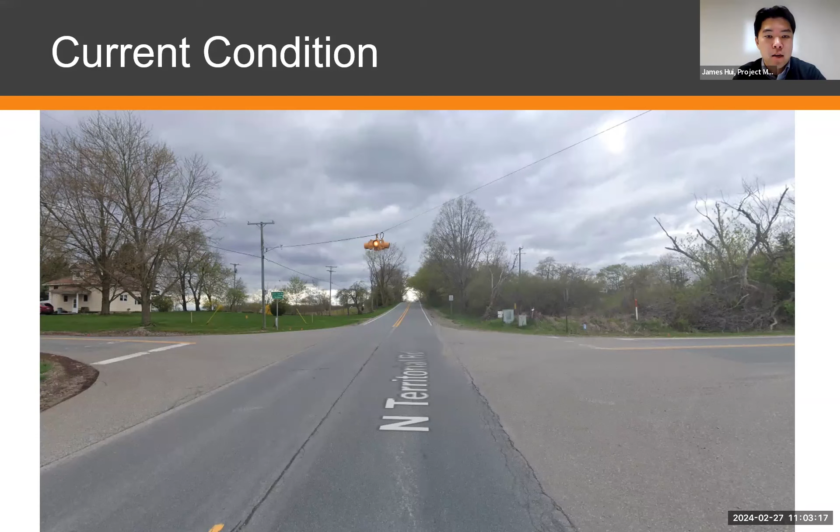Funding and costs: we like to be as transparent as possible about the funding. We have a mix of federal funding and Michigan transportation funding in this job. And the project overall is estimated to be about $2.1 million.

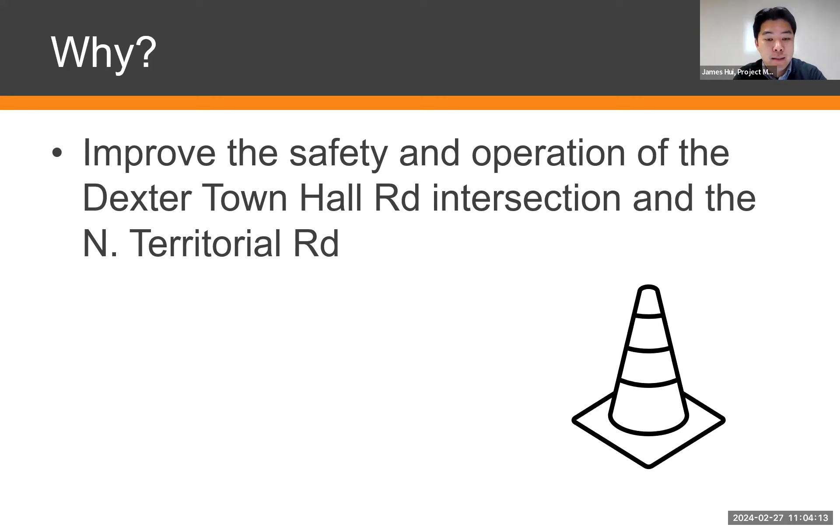So why? We talked about this a little bit before. There's a variety of things that we're trying to improve at this project, including the intersection, improving sight distances. You've probably noticed a lot of utilities that have been moving out there in the recent months. We are replacing the culvert east of this intersection that happens to flood pretty frequently, and we're raising the road to a certain extent around the intersection as well to try to prevent that flooding from happening in the future.

Project overview: we will be removing trees. You might be noticing a lot of trees marked for removal now. The reason we mark these trees is that either they're in our improvement limits where we have to remove them to widen the road and improve the intersection, or if these trees are too close to the road where it could pose a danger for motorists, those trees are also marked for removal. I believe we have been in contact with a lot of residents out here on tree removals, and those that want the wood have been contacted as well.

Again, we're replacing the culvert that's east of the intersection. We have noticed in recent years that it does flood there, and we've noticed that the culvert is failing in that spot. So to add to this improvement project, we have included that culvert replacement, and we're raising the road over the culvert as well.

And then the primary chunk of this work will be at the intersection itself. We're adding a left turn lane on North Territorial for both northbound and southbound Dexter Town Hall Road. And then, like I mentioned before, we will be doing minor work outside of the road construction limits, including center line rumble strips.

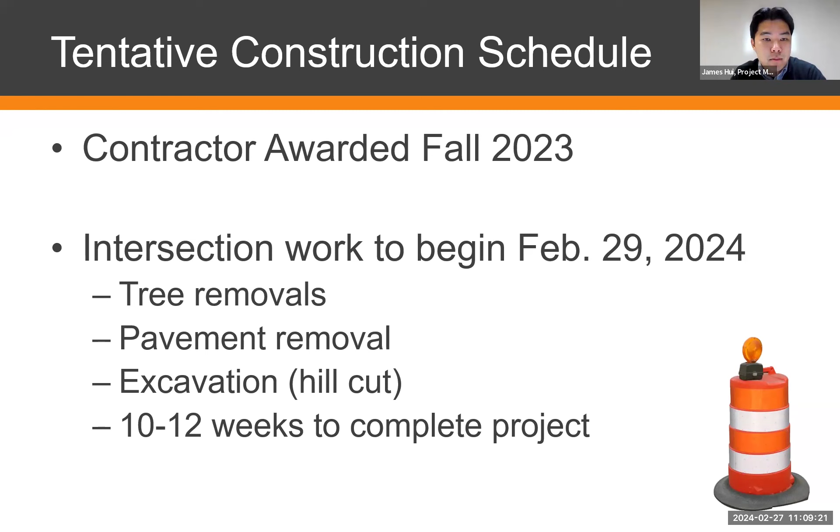As for impact to traffic, I think we're hammering on the same information over and over again, but it's very important to keep talking about it, because one of our biggest concerns when closing a road is that people just don't know - they aren't aware of it until they get to the closure. At that point, I've done it myself, you panic and try to figure out how to get around it. So we try to be as transparent as possible and communicate as early as possible.

We've had signs out, message boards out, basically indicating when we're starting the project. We are making sure everybody on this meeting is aware that this closure is a full closure. Again, we will make sure that all residents and businesses within our limits will have access in and out of the project safely. But for anybody else that's not within our project limits, you cannot make it through - you cannot go through the intersection.

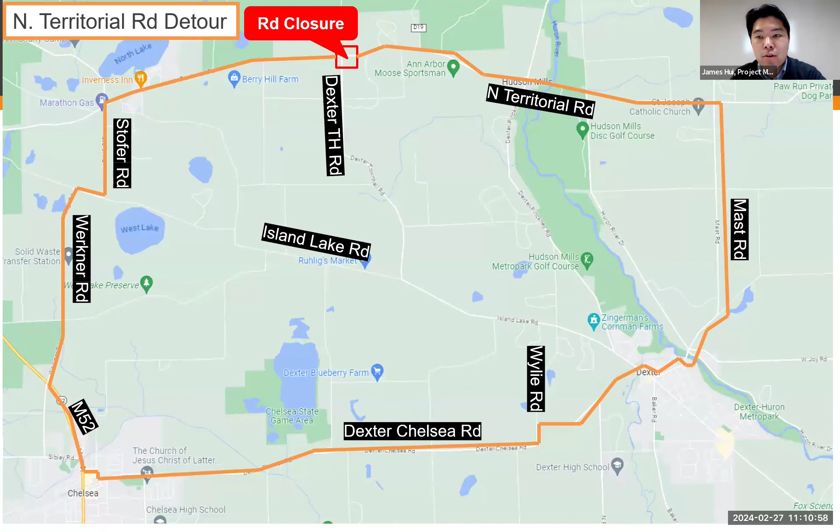So here's the detour. I know it's a long one - this is for North Territorial. It's this long because we are required to detour paved road with paved roads. This is the map, I won't go through all of it. I'm sure any motorist will figure out their best way around the project, but this is our recommended detour for North Territorial Road.

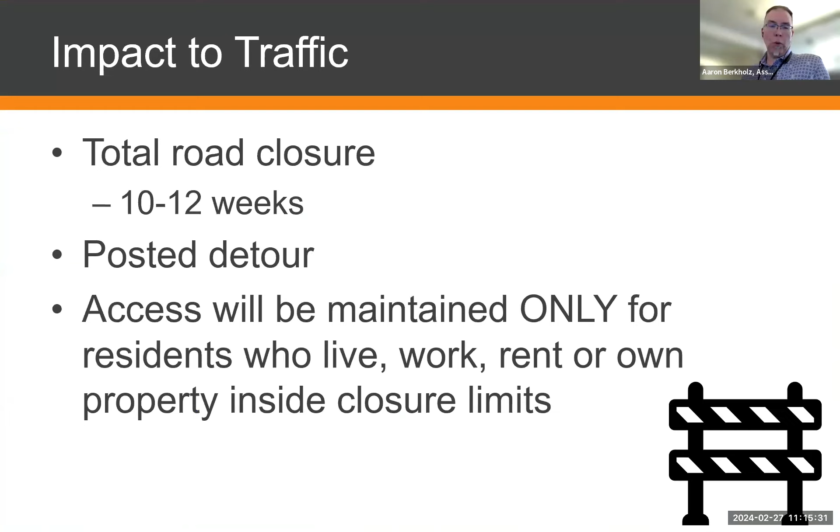And then the replacement of the culvert to the east of the intersection that has been problematic over the last several years with road flooding. Our hope is that by replacing that culvert and taking the dip out of the road there, it improves that situation, particularly during the winter and spring months.

Dexter Town Hall will remain the stop-controlled portion of the intersection. So when we've completed our work in 10 to 12 weeks, there will still be the need for traffic to stop on Dexter Town Hall Road.

But the great improvement here is when you stop on Town Hall and look to the west, you'll be able to see if there is a vehicle approaching. I think anyone who lives or travels in this area will admit that this is a challenging situation if you're on Town Hall trying to enter safely onto North Territorial Road.

I'll mention we've had portable changeable message signs, or electronic message boards, out on the job site for about the last two weeks — four on North Territorial Road and two on Dexter Town Hall Road. After today's meeting, we will be updating those boards again to reflect the intended closure of the intersection on February 29th, this Thursday. Also, I want to note a couple more things.

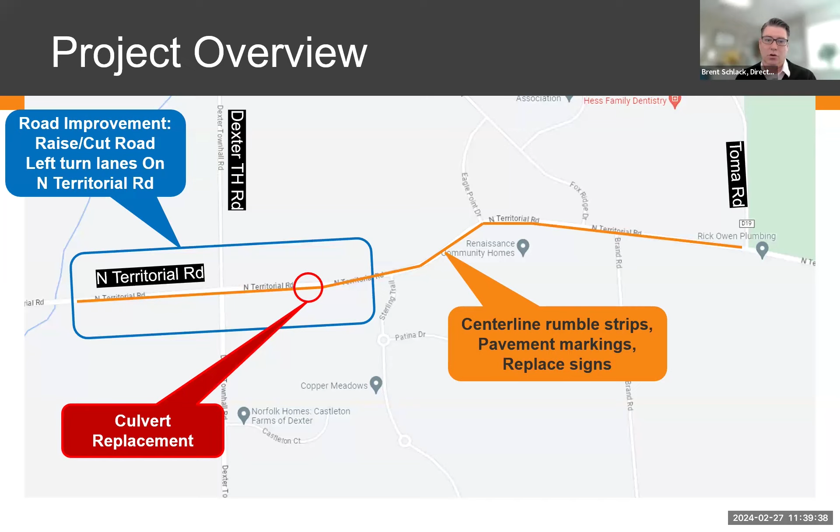Brent, do you have something to add? Yeah, I wanted to further elaborate on the speed limit. In order to establish a speed limit, we utilize the 85th percentile speed, which is governed by law. It's a 3-party agreement between us, the Michigan State Police, and the township, and they all have to unanimously agree. The Michigan State Police actually perform the speed study, looking at the 85th percentile speed, condition of the pavement, and any crash history that would be correctable based on that speed limit. So looking at sections of North Territorial, they're looking at what people are traveling, that's what 85% of people are traveling at or below, in order to establish that speed limit.

To artificially lower that speed limit wouldn't be conducive. People are going to travel the way they feel comfortable, and it then becomes an enforcement issue. They like to establish the limit based on what 85% of those people are traveling.

I got another question in the chat from Kari: last she heard, the new development at the corner of Dexter Town Hall Road and North Territorial Road was connecting to the Multi-Lake sewer. Will that be happening as the hill shave happens? Yes, we've been working with Multi-Lake on this, because they have relocated their line since we're cutting the road much lower than it was before. So Multi-Lake has a tap ready for that subdivision whenever they do come in and develop. We've coordinated all of that, yes.

Wendy asks again, what time on Thursday will the road close? I can't tell you an exact time, but contractors typically like to work as early as possible. You might see people out there as early as 6 in the morning, but it takes a tremendous amount of effort from the crew and time to set everything up. So I can't tell you exactly when, but please plan to take a detour starting Thursday.

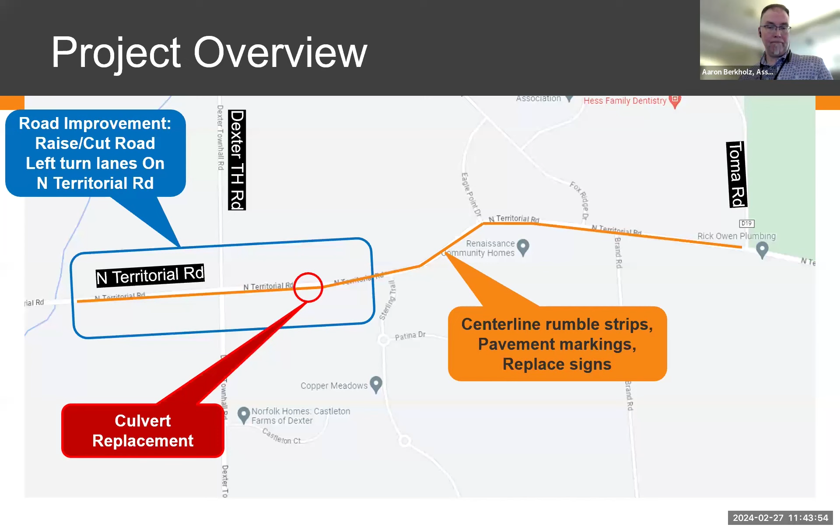Okay, I think I got one or two more questions in the chat. Kathy Crouch just wanted to make sure that their trash services have been notified. They said that they use a non-common trash service called Silver Lake Hire Trash Company.

If you can send me their contact, I'll be more than happy to call them for you. In these areas there's a lot of different services. Typically they see our closure and they go around. Again, they're there to make money and profit, and if they don't hit your house, they don't make that money. So I will do my best to call every trash service that is provided to me, if you can give me that contact information.

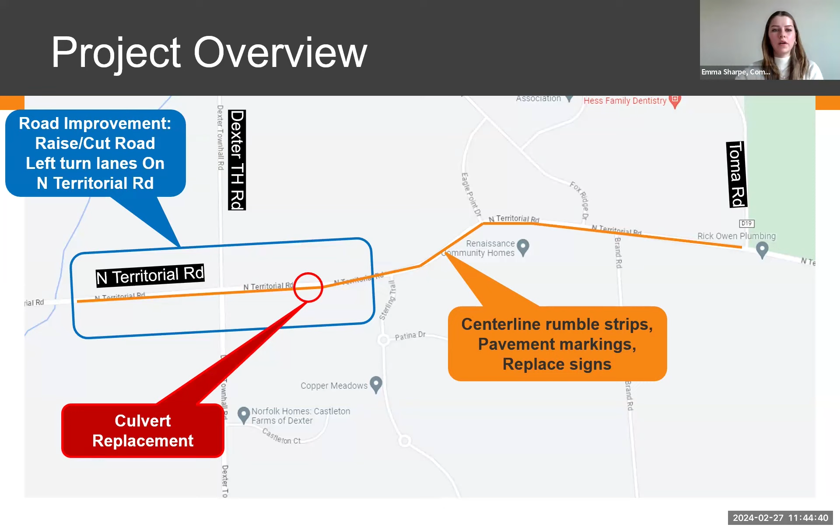Kathy, if you either want to provide your contact information in the chat or reach out to James on your own with the contact information that's been provided here, just so we can make sure we know what trash services to contact.

Okay, I am not seeing any more questions in my chat, and I'm not seeing anyone with their hand raised. Just to reiterate again to the co-hosts in this meeting, check their chat. And if we have any more questions, we can ask them now, but I think we're ready to wrap up this meeting. I got a few, so I can answer all these. I got a message asking, will there be additional water flow on surrounding property?

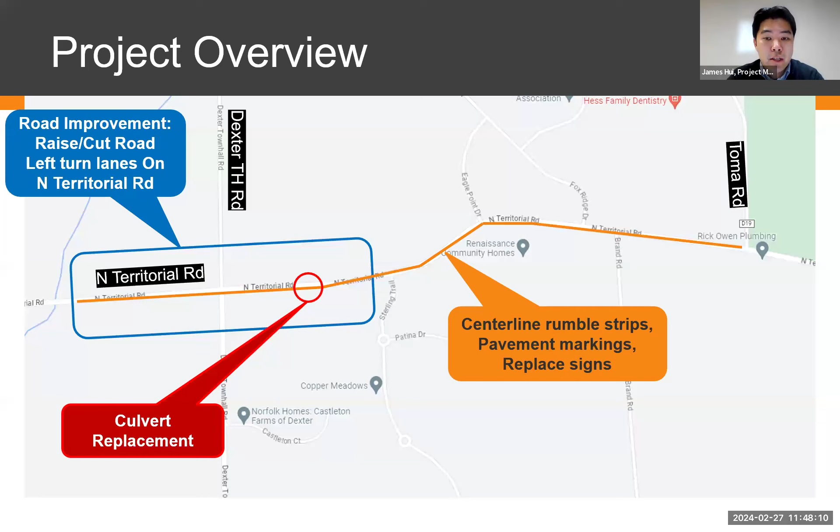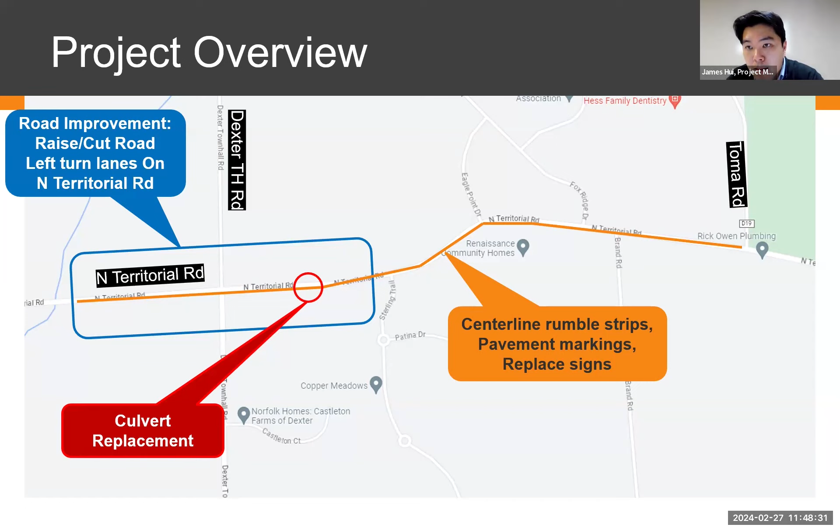If a driver is going to use an unpaved road, would the county better maintain those dirt roads? As mentioned before, we will be keeping a close eye on any of the nearby dirt roads. We fully anticipate people using those because they are a lot shorter than our posted detour routes, and we will do what is needed to maintain those roads at the time and after. I think that's all the questions I got.